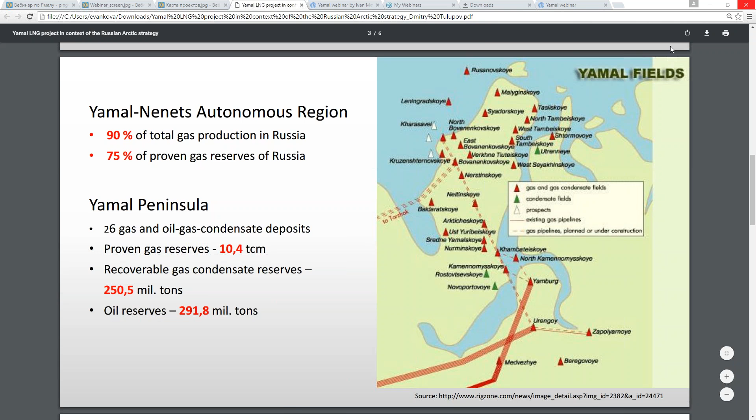So a question for you. Do you consider Yamal LNG as the project which has critical strategic importance for the place of Russia in the overall energy balance?

Yes, I think that the strategic and economic importance of this project is overwhelming because this is the first major project in the Russian Arctic which has such strong ambitions in foreign markets, and many countries show their interest in this project, not only in Asia like Japan or China, but France is also an active stakeholder in this project. So I think this Yamal LNG initiative is a first major step, so to say, in the implementation of the Russian Arctic strategy.

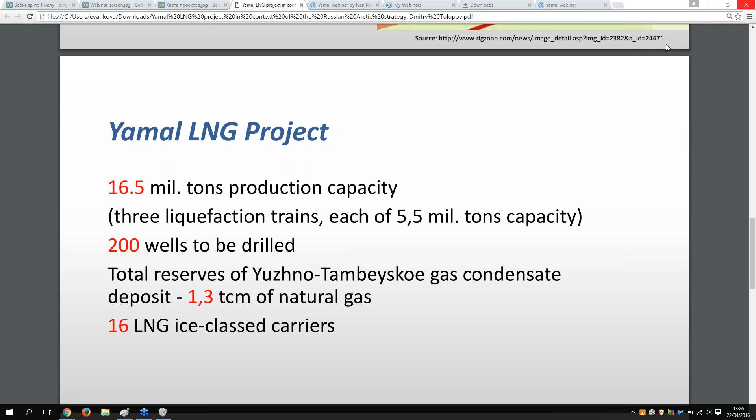Dmitry, what do you think about the distribution of answers? Do you agree with this scheme? Because it's pretty much supporting what you have mentioned about the Yamal LNG project. Well, usually all polls have some reasonable degree of prejudice, but I will agree with the following idea, that Novatek has a pioneering experience, so it's very consistent to give the first place in this poll to Novatek.

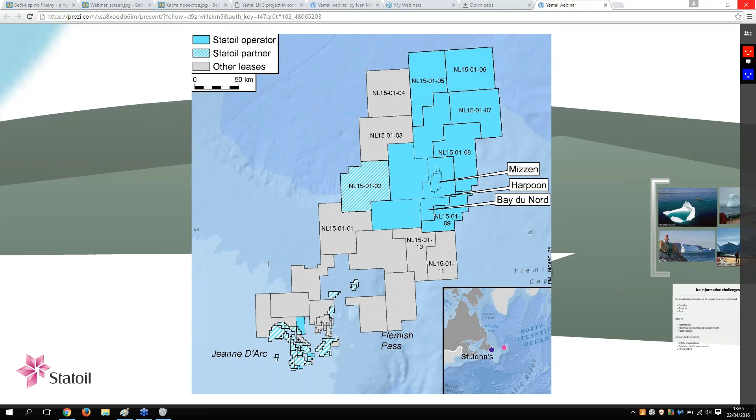Actually, at the end of last year, we secured access to new major acreage in the Flemish Pass Basin, offshore Newfoundland. Those new licenses total approximately 15,000 square kilometers in proximity to our previous Bay du Nord, Mizzen, and Harpoon discoveries shown here on this slide. This deep water region is very challenging due to the threats from massive icebergs and potential sea ice encroachments. This slide here shows some of the threats we are facing in this region. Basically, we operate an entire fleet of iceberg management vessels that routinely tow away hazardous icebergs from the vicinity of our installations in this region.

Nevertheless, our platforms obviously have sufficient hull strength to withstand accidental ice impacts, which results in a capex footprint, of course. Additionally, we are in need of solid tools and technologies for estimating operational expenditures for ice management support operations, as well as for estimating downtime of our production in case of disconnection events. And this leads us to several ice information requirements that are shown here. We need to be able to robustly identify when ice can be present in an area of interest, its duration, amount, and type. This information gives input to the analysis of infrastructure accessibility, logistical requirements, and facility design, which are fundamentally driving our decision-making process, which is based on our need to ensure safety of operations, zero harm to the environment, and optimized CAPEX and OPEX.

So we have developed a technological platform for addressing these challenges, which I'd like to share with you here. We start our ice management process with observations, and these observations include satellite, aerial, and vessel-based records. These are compiled into ice surveillance reports, which are given to the operational experts in our central control point, who integrate them and forecast the operational situation on site. Then this information flows to the decision makers who perform the threat assessment and surveillance assessment. They may find that we need more information or that we need to deploy our fleet of vessels to manage the threat.

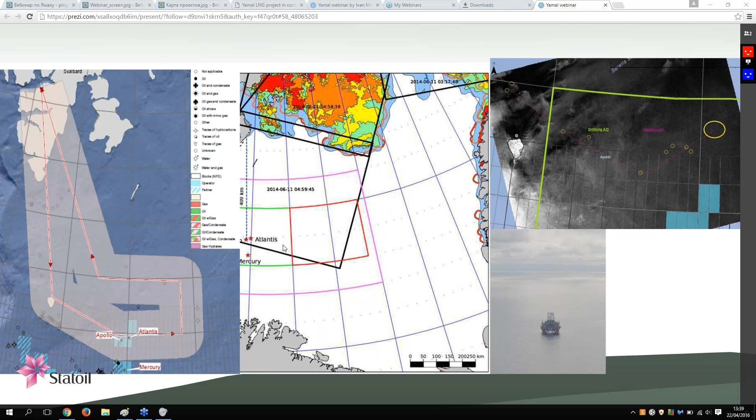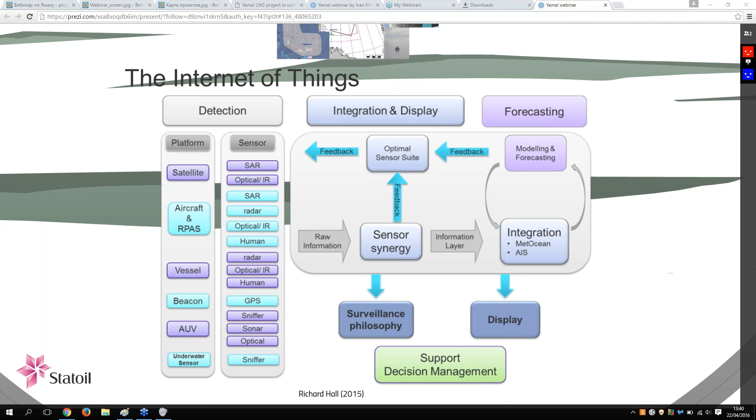That goes into the modeling and forecasting loop, which gives feedback to the deployment of an optimal sensor suite and eventually closes the loop to the detection platforms we are using. The final outcome of this loop is the surveillance philosophy and the display provided to the decision maker in support of his critical operational decisions. So in totality, this can be summarized as a combination of synergies between optimal sensor suite, integrated information management, and improved models and forecasting.

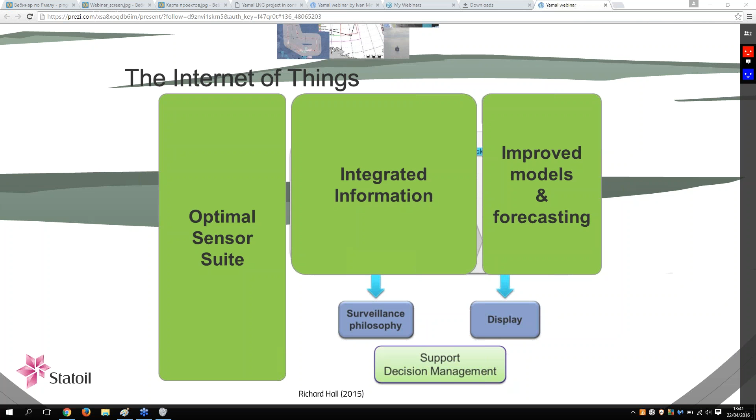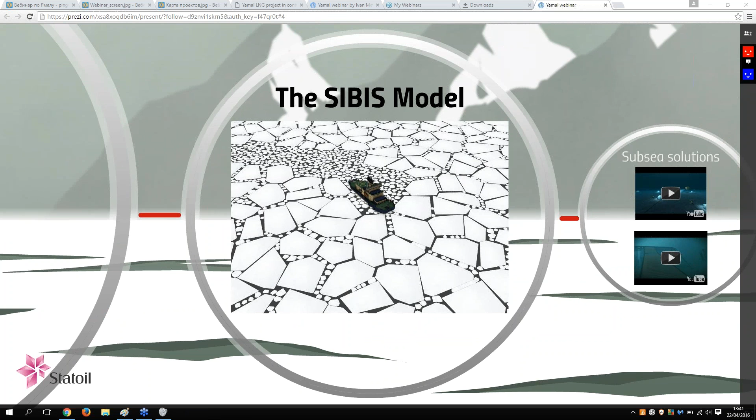When it comes to improved models and forecasting, I would like to mention one example of a numerical tool we are using, which is called the simulation of interaction between broken ice and structures. This model has been developed by us in Statoil for our internal use, and it simulates ice forces and ice actions on floating structures and vessels in the Arctic. The vessel here is modeled with high fidelity using a detailed mesh representation.

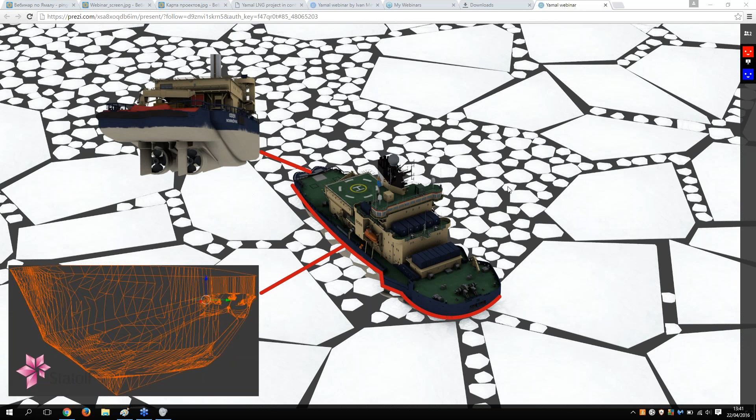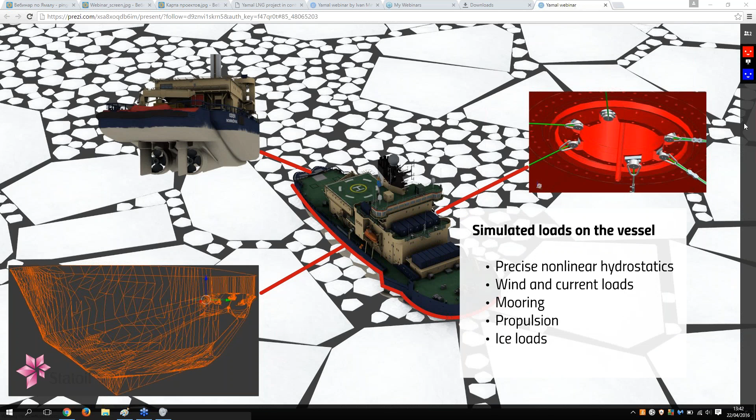We have a description of the propulsion system. It can be nozzles, rudders, or azimuth thrusters. We have a mooring system representation. It can be turret mooring, spread mooring, or other types of mooring systems. And we simulate precise nonlinear hydrostatics, wind and current loads on the vessel, mooring and propulsion system loads, and ice loads. When it comes to the actual ice loads, each ice piece is simulated with high fidelity using its detailed physical and mechanical properties: thickness, density, flexural and compressive strength, Young's modulus, Poisson ratio, fracture toughness, etc.

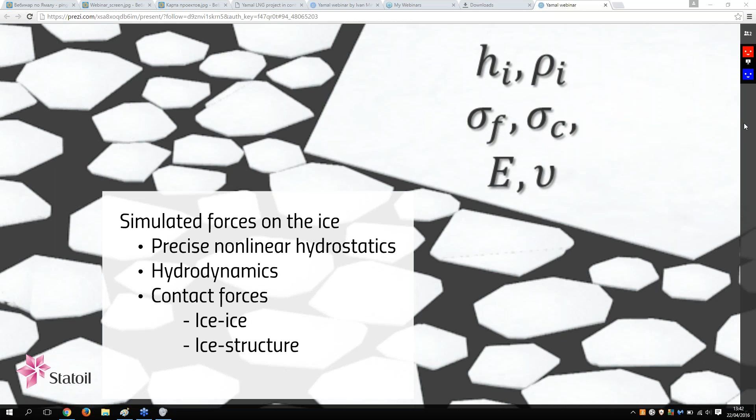Forces basically lead to a precise description of how the vessel would behave under the influence of the ice environment: pressure, friction, and failure of the ice, crushing, rafting, flexural bending, and splitting. And this system allows us to perform probabilistic analysis and exposure considerations depending on the type of ice that is encroaching on our operational site. And using our cloud computing GPU-accelerated simulation technology, we can in real time play with many different operational scenarios and then take decisions based on the level of threat. In this case, it can be, for instance, the force in the mooring lines acting on the vessel.

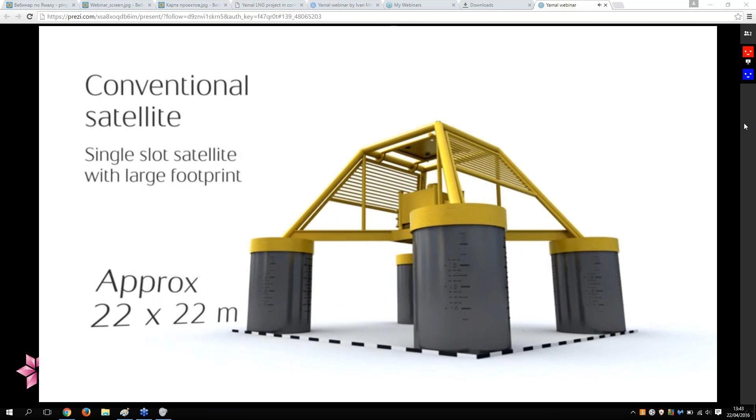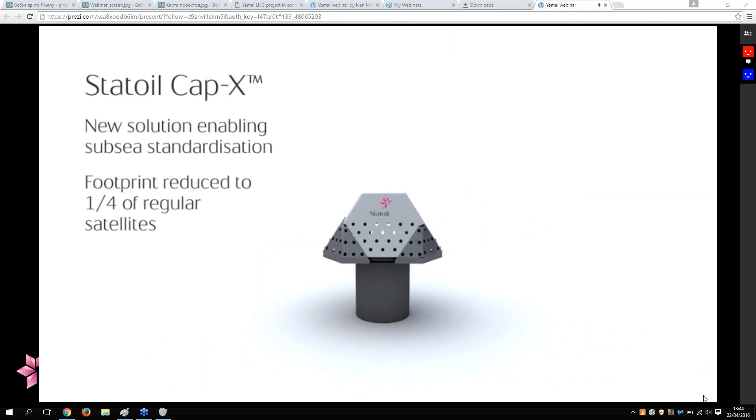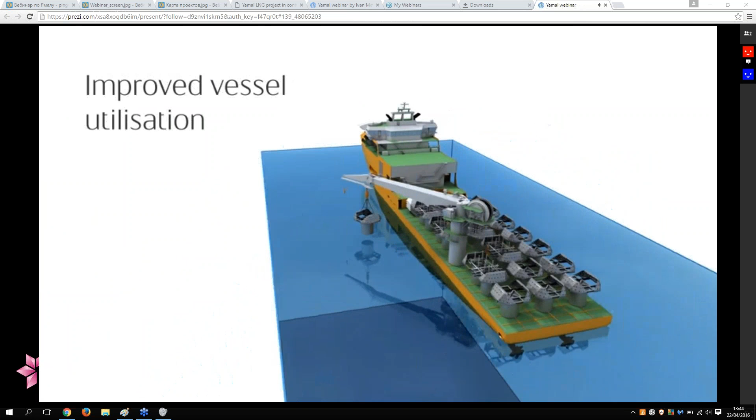This concludes the ice-related part, and I would like to wrap up with a video about our subsea development. Next is our new subsea innovation, which is intended to become the standard for next generation subsea solutions. The objective of this technology is to increase efficiency and reduce costs of subsea installations and developments in the Arctic. It is produced in much shorter time and with potential for local production, for local content. It moves more activity from the rigs to the supply vessels, and essentially it is built around the well-known suction anchor technology. Steel suction anchors are the foundation of the solution, supplemented by a skirt and a cap in glass fiber.

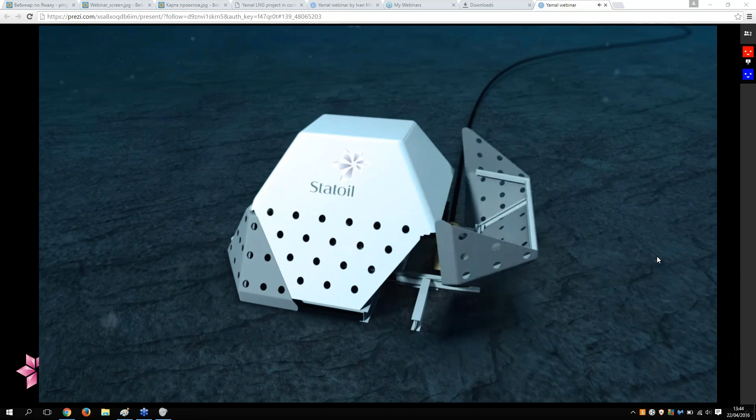And with this, we're basically one step closer to a plug-and-play solution on the seabed.